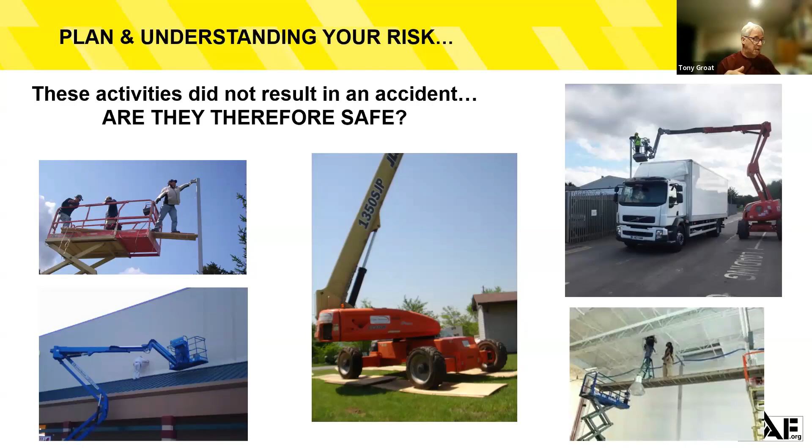So next, I'm going to show a little video of a fall accident, which kind of gives a summary of the points we're trying to make here.

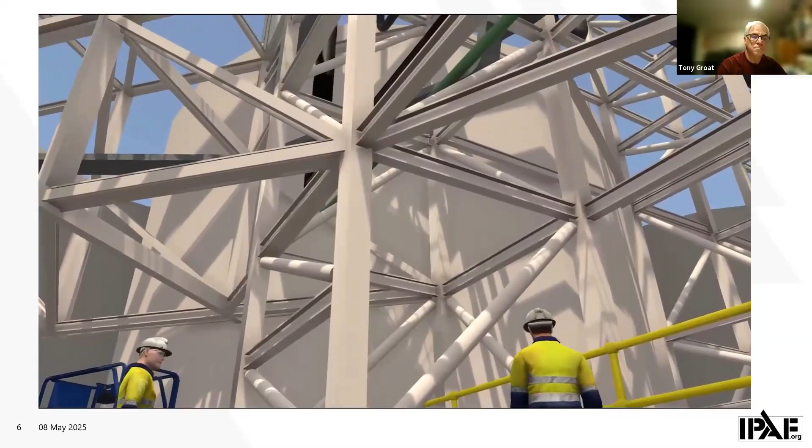On the 29th of July 2018, as part of construction works, two contract workers were tasked to rig a steel pipe in the regeneration kiln area at Cowal Gold Mine. The unusually shaped pipe was required to be fitted 4.8 meters above ground near pipework, tanks, and structures. The pipe was to be connected to existing pipework located inside and outside an existing four-post structure. To accomplish the task, the workers were using a scissor lift.

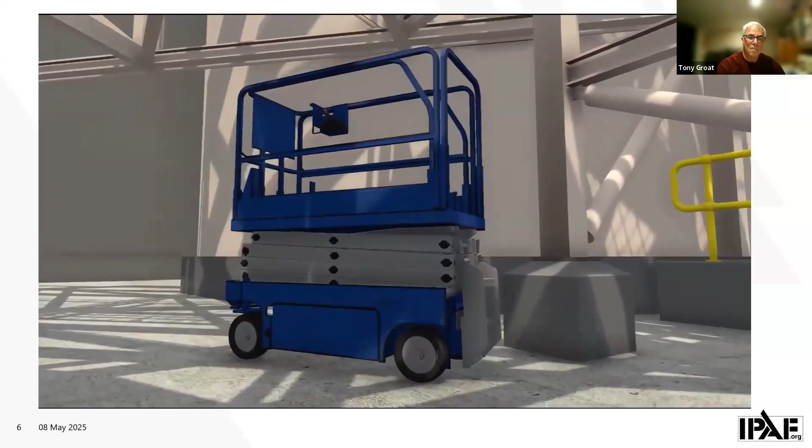The worker was wearing a safety fall arrest harness and connected it to an anchor point on the scissor lift. He climbed onto the scissor lift's platform, which was in the stowed position, and operated the scissor lift using its wired control unit. The workers found the scissor lift to be too high to fit under the angled steel bracing connecting two of the structure's upright steel supports. The worker suggested to his co-worker that they take the guardrails off the scissor lift and then walk it into the structure using the wired control unit. The guardrails would then be refitted prior to use once inside the structure.

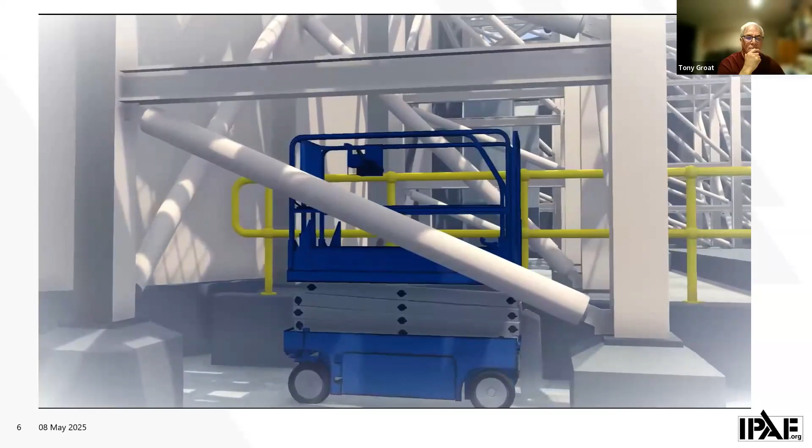The worker and his co-worker unfastened the bolts that secured the front and left side guardrails to its platform. They removed the left side guardrail, lifted the front guardrail from the tubes it was housed in, and rested it on the platform. While still on the platform of the scissor lift, the worker was wearing his safety harness, but did not attach it to an anchor point on the scissor lift. The worker held the wired control unit and began driving the scissor lift forward while on the platform.

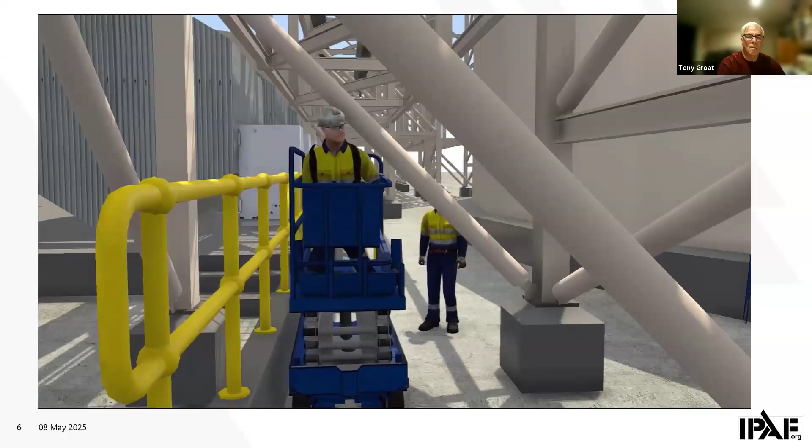As he did this, he lost his balance and fell forward over the front edge of the scissor lift, striking his head on the concrete surface about 1 meter below the platform. An emergency response was activated.

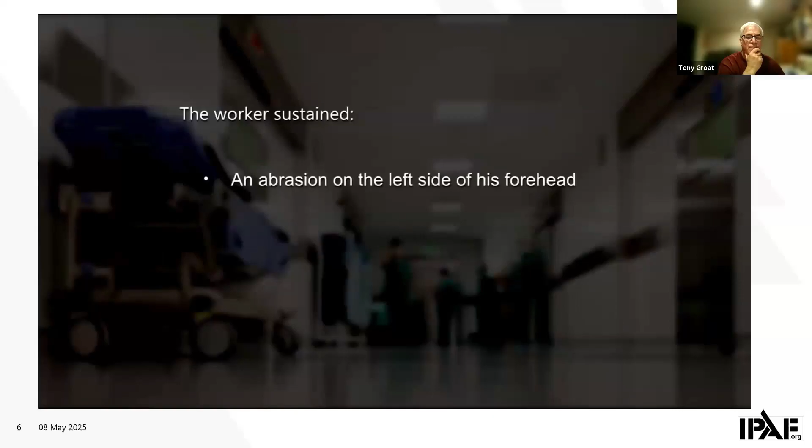The worker sustained an abrasion on the left side of his forehead, experiencing pain and altered sensations in his limbs and left hip. He was diagnosed as having sustained severe narrowing of his spinal cord and underwent surgery, where he experienced a series of complications. On the 8th of August 2018, the worker suffered a cardiac arrest, which is believed to be secondary to his spinal surgery.

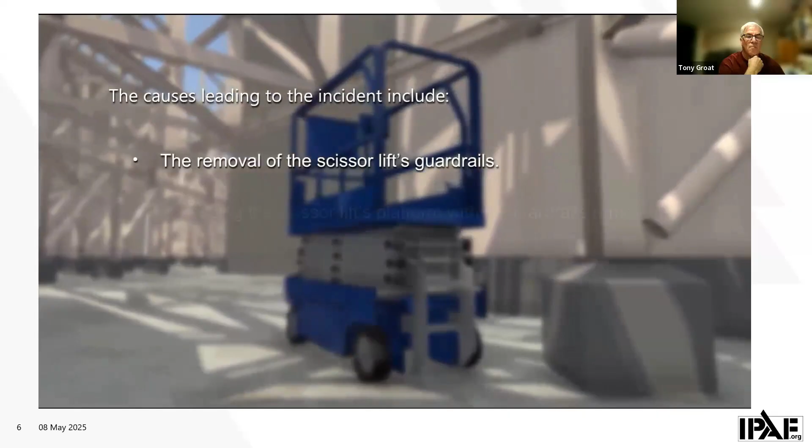His condition further deteriorated and he tragically passed away on the 14th of September 2018. The causes leading to the incident include the removal of the scissor lift's guardrails, accessing the scissor lift's platform with its guardrails removed, and operating the scissor lift with its guardrails removed.

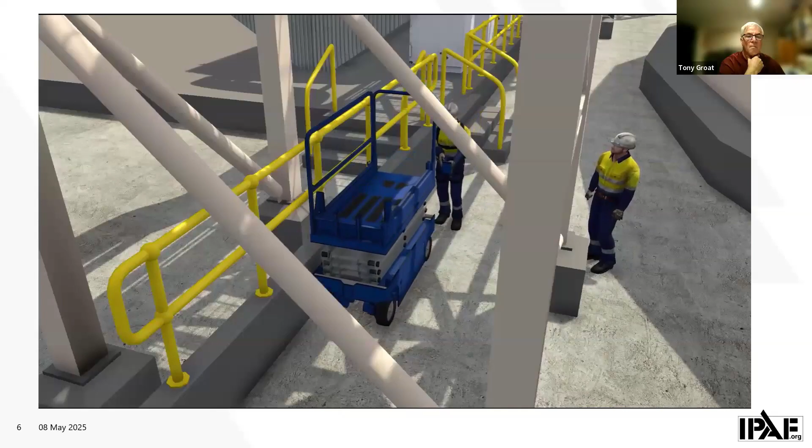The investigation found that had the workers walked the scissor lift through, this incident would have been prevented. Regardless, had the worker's harness been appropriately connected to the anchor point of the scissor lift, it would not have prevented a fall over the side of the scissor lift.

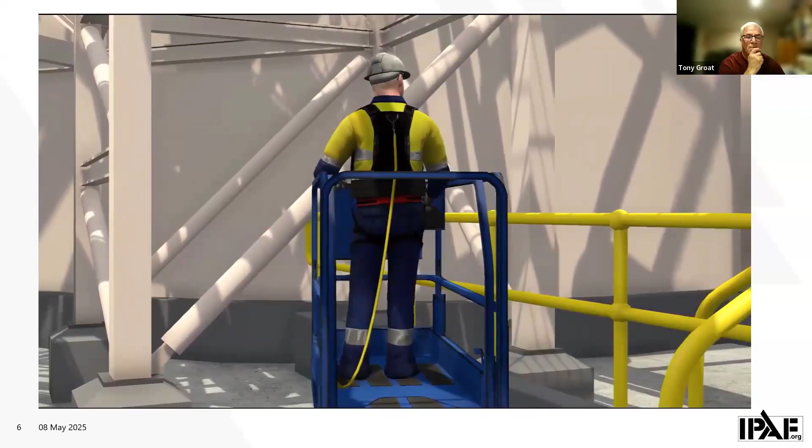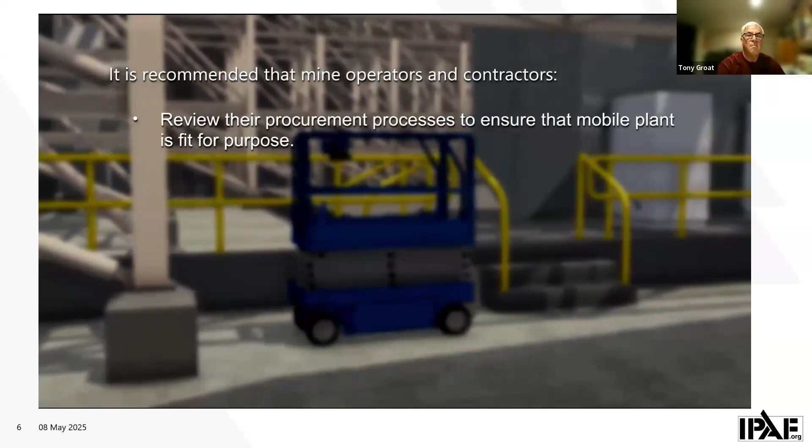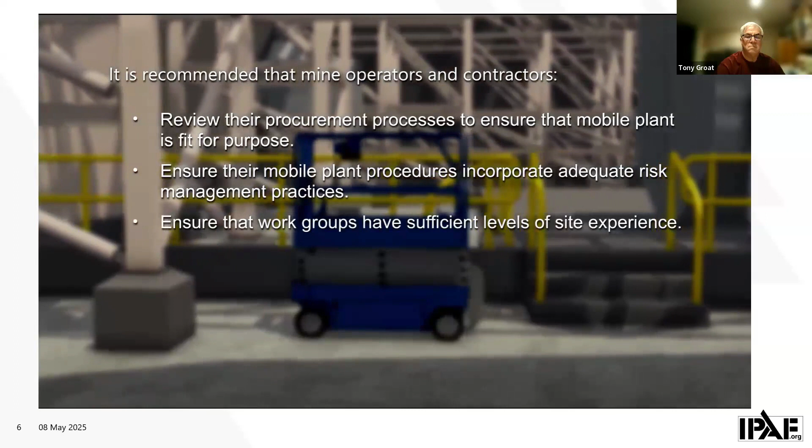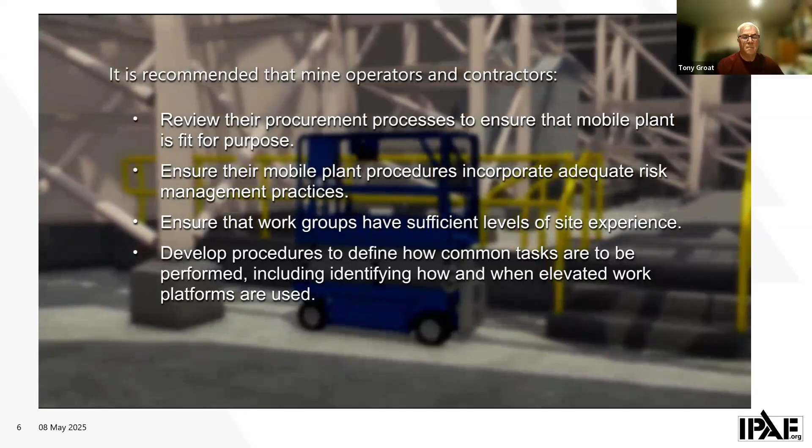While working at heights, most people who are seriously injured or killed fall from a height of 4 meters or less. It is recommended that mine operators and contractors review their procurement processes to ensure that mobile plant is fit for purpose, ensure their mobile plant procedures incorporate adequate risk management practices, ensure that work groups have sufficient levels of site experience, develop procedures to define how common tasks are to be performed, including identifying how and when elevated work platforms are used, train workers about managing risks associated with plant modification, and educate workers about the degree of harm which can occur when working at heights.

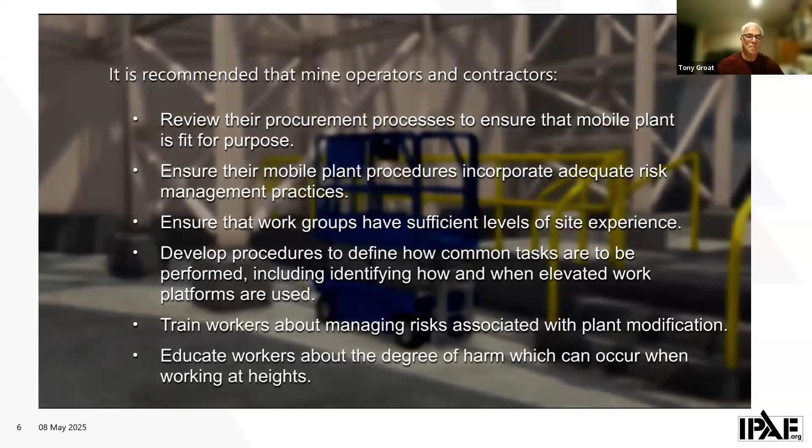So the real message I want you to take from that video were the end conclusions that were made. You see a fall from a scissor lift that wasn't even in the elevated position. You find out that in that particular case, the fall would not have been prevented even if they were wearing personal fall protection equipment. So the fall still would have taken place.

So really what we're looking at, understanding it in its full context, is that safe operations require lots of individual activities. You need to have properly trained operators and supervisors. You need to make sure that you have the proper selection of the mobile elevated work platform and the equipment associated with it, which could be personal fall protection equipment, or protecting the area from someone hitting it.

There's a wide range of those, which is identified through doing a risk assessment and putting in place safe work procedures for hazard awareness, and then monitoring and supervising to ensure compliance with all of those elements. So there's many tasks that need to be taken into account, not just saying, am I wearing the proper fall protection equipment, but that also is another important aspect that we're going to address today.

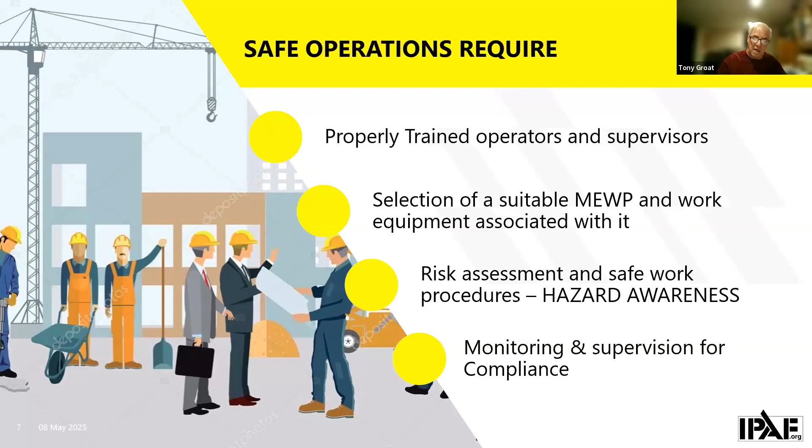So today we're going to be looking at a couple of the pieces of the puzzle. We're going to be looking at hazard awareness and proper selection of equipment.

So the numbers really say it all. If you're looking at it from an OSHA perspective, who mandatorily has reports for any fatal or serious accidents that occur, in 2022, within construction industries, there were over 1,000 workers who were fatally injured. And within that, they have what they call the fatal four, which are falls, struck-bys, electrical, and caught-in-between. Within those, 38% of those, or 410 workers, died from falls in 2022 alone. And that number is relatively consistent over the years.

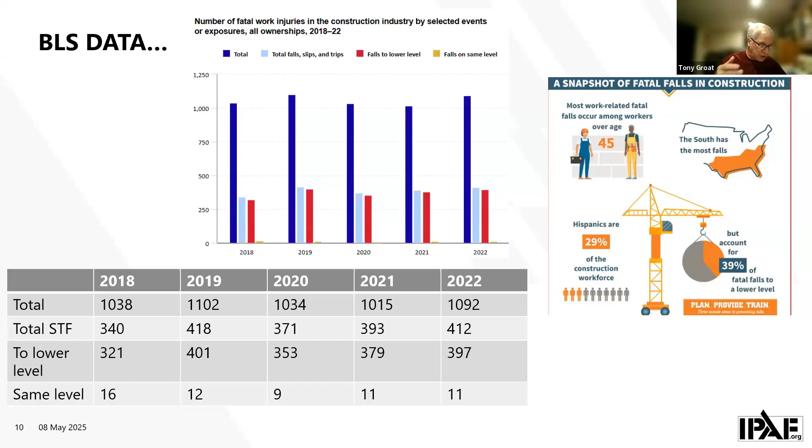And then when you're slicing that onion down a little bit deeper, they give you information that says when you're looking at those within the construction industry, most were related to falls that occur with workers who are over the age of 45. The people in the South had most of the falls. And while Hispanic workers represent 29% of the construction workforce, they account for 39% of fatal falls to a lower level. So looking at the information gives you more education to know some of the areas where we need to look at and concentrate on and take action.

IPAF, as an association, has its own reporting portal that we invite anybody to go to anonymously and put in incidents that occur, and we look at the data for mobile elevated work platforms only. So when you're looking at the data that we have over here, again, looking at the data for 2022...

You can see the first, which is 1B, which are what we call static or vehicle mounted MEWPs. They represent 45% of the incidents that occur. Then you have 3B, which are self-propelled booms. They represent 12%. Then we have vertical mobile machines, which most people call scissor lifts, a 3A machine, that's 29% of the incidents. And then 1As are a static vertical, a lift that goes up and down but needs outriggers, so it's not drivable when elevated. That's 2% of the incidents that occur.

And then there are others, which are mast climbers, transport platforms, and other items outside of the traditional categories. So when you're looking at all of these products, it's telling you that a fall can occur from any one of these.

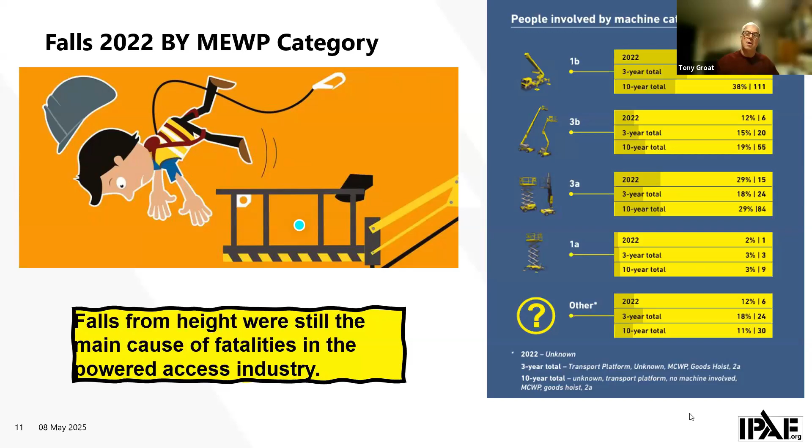So while we traditionally talk about the requirement to wear personal fall protection on boom type lifts, you can see 45% are vehicle mounted and 12% are self-propelled, and 29% occur with self-propelled verticals or scissor lifts. The catapult effect, which we'll talk about a little bit, is why you need to wear personal fall protection in addition to the fully guardrailed platform on boom lifts. But you don't have that same dynamic with scissor lifts, yet we still have people falling out of those as well.

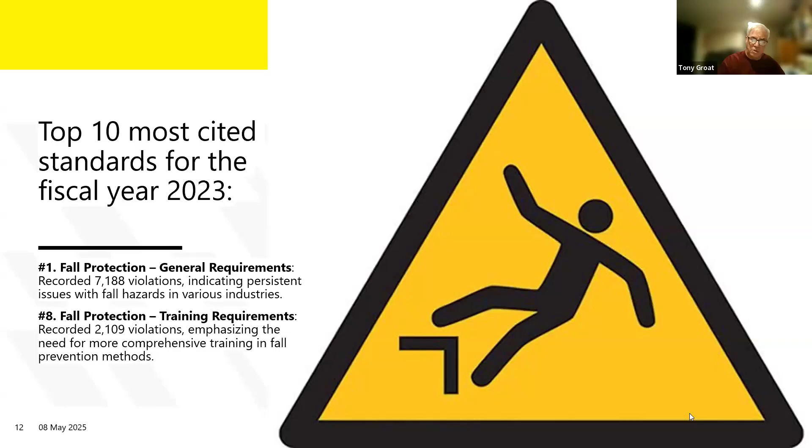When we're looking at the data that comes from OSHA, the top citations show that 2 of the top 10 are related to fall protection. One is the falls themselves, and the other is fall protection training. So these 2 items are constantly at the top of the list, and it's an area where we need to make improvements, because as you look at the accident data, we have over 1,000 every year, and we need to do something to bring those numbers down.

So when we're looking at our standards for aerial work platforms, we have what's called a Group A and a Group B. Group A is where the platform extends over the chassis, and Group B is where the platform extends beyond the chassis, so the tipping point goes outside of that.

And dominantly, we require through OSHA, ANSI, and all other regulations, the use of personal fall protection equipment, in addition to a fully guardrailed platform, on all Group B type equipment.

However, on Group A machines, which are dominantly scissor lifts, a risk assessment may identify reasons you would still wear personal fall protection. It could just be a site requirement. In addition, on Group A machines, a manufacturer may recommend wearing personal fall protection on scissor lifts. I know specifically that one manufacturer, JLG, does make that recommendation. So that would be a case where you'd be wearing it on all MEWPs in operation.

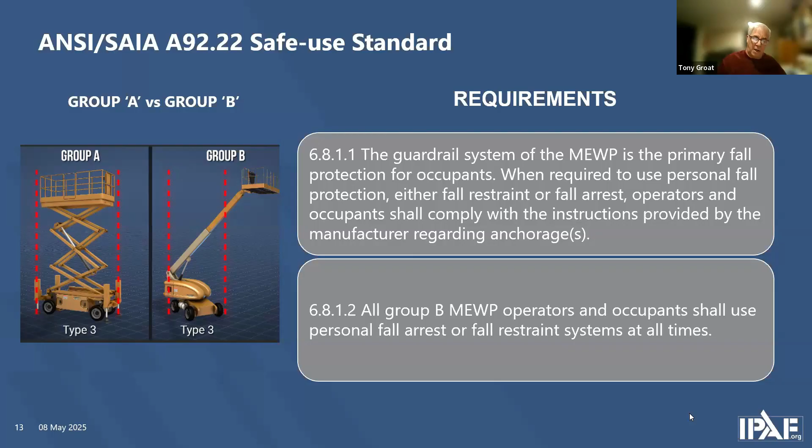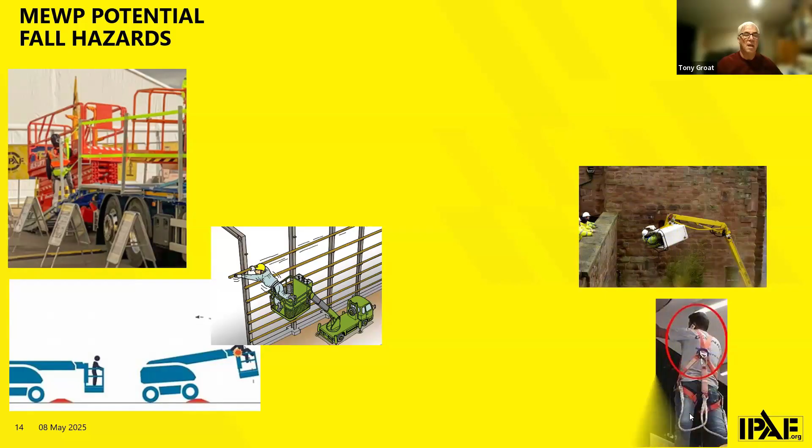So the next thing I'm going to do is take a look at some of the common hazards associated with MEWPs regarding falls. The first one is falls that occur when you're loading and unloading equipment. That's one most people may not think about, but there are an awful lot of incidents that occur when loading and unloading equipment off of a vehicle.

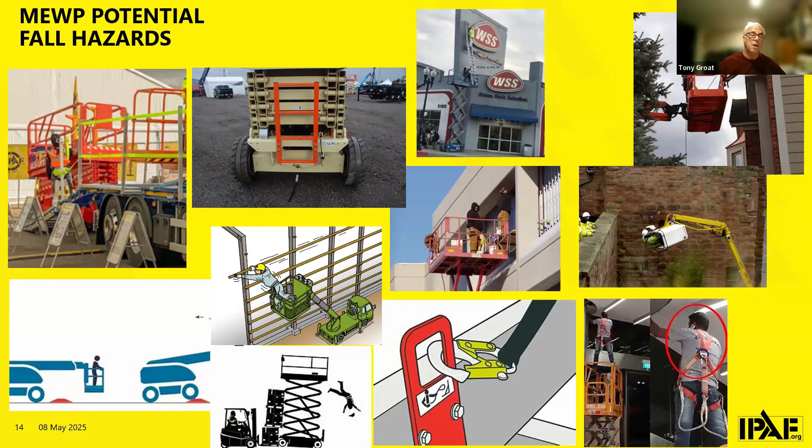Secondly, you have this example down here, which is what we call the catapult effect. When the machine, boom type lifts specifically, goes over some type of bump or divot, you end up with this work platform on the end of a beam. The calculus for that involves what we call the moment of inertia, where all that moment of load is put into the work platform, and it can literally eject an individual out of that work platform.

That's known as the catapult effect. And that is really the reason why OSHA, ANSI, and all of the manufacturers require you to wear personal fall protection in addition to a fully guardrailed platform on boom type lifts.

Down below, you can see here we end up having struck-by hazards. So you have a lift that's up in place and you have other vehicles in the area, could be a crane going by with a load. You have a struck-by, which can end up causing an individual to fall out of the equipment.

You end up having a situation where an individual is overreaching in the work platform. So the work practice here is making sure you connect your personal fall protection. Too often individuals on a mobile elevated work platform are wearing personal fall protection but get in and out of the machine and forget to connect to the anchorage point.

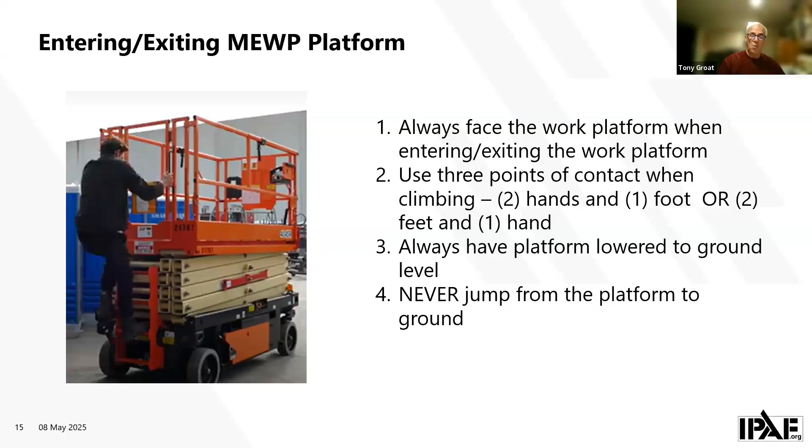So this covers the basic types of falls that can occur. These are the hazards you need to consider when doing your risk assessments and making sure you are properly protected. The next step is to look at what personal fall protection is appropriately selected for this use.

And I'm going to turn it over to Robert. So Robert, now it's over to you. Okay, thank you, Tony. Good morning, everyone. So I'm here to help you determine what level of protection is required.

Selection of the appropriate personal fall protection system. There are three components to a fall protection system: you have your anchor point, your body wear, and then your connection - being lanyard, restraint, shock absorbing, or SRL.

Here are the anchor points that most mobile platforms have, and you have to connect to those anchors specifically based on the manufacturer of the MEWPs, scissor lifts, and similar equipment, because you're anchoring yourself below your back dorsal D-ring. You have to make sure you're anchoring and locked in only on the anchor points of this equipment, so contact your manufacturer to make sure you're connecting appropriately.

As Tony mentioned earlier, training is key - training on how to put on your harness. Just like the picture before where the guy wasn't even connected - he had his harness on, but he wasn't connected. So you've got to have a lot of training. Make sure you get training on how to don the harness, and make sure you have the proper connections and understand how the equipment works.

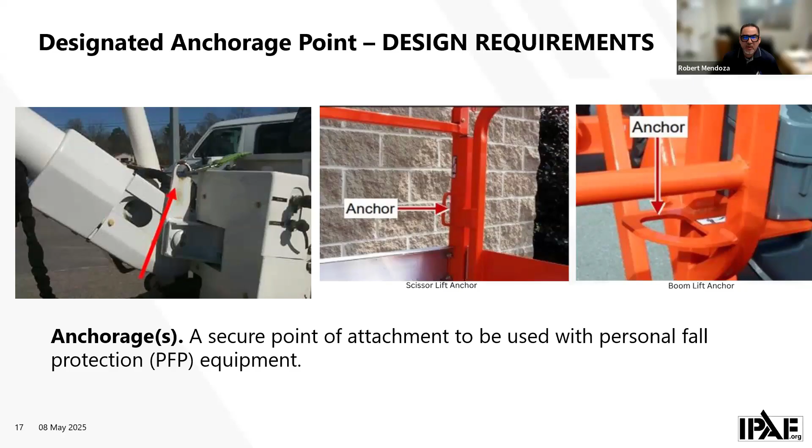On the MEWPs, you are supposed to be using a Class 2 with the new reg of the Z359.14 2021. Class 1s are for overhead connection. In the MEWPs or mobile platforms, it is required an SRLP, which is a personal device, which they're showing a 100% tie off with the 2 legs. But like I say, they do have the single leg, which are most common in these mobile platforms.

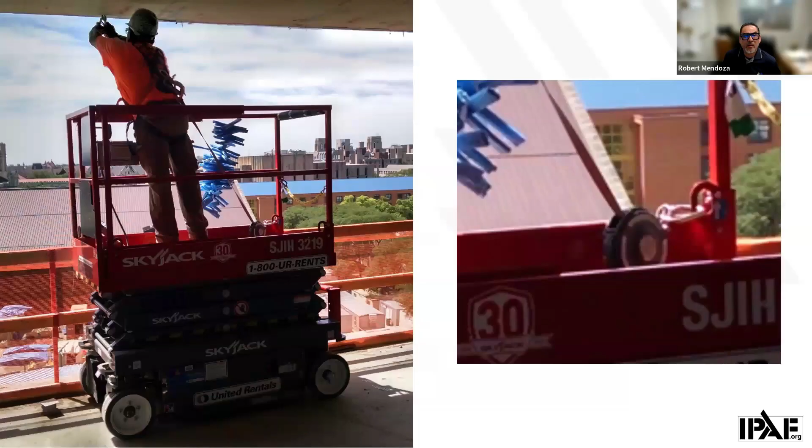So here you see this gentleman connected. As you can see, his SRL is at the anchor point. For the most part, the old standard, you're not able to do this, neither with the new standard, because most manufacturers have their shock absorbing on the outside of the actual block, whereas you have to connect it to your back dorsal D-ring. This one here is an old device because it doesn't show any type of shock absorbing mechanism on that particular device, but it is anchored incorrectly.

There are manufacturers out there that have the new Class 2 where you can use them both ways, where the body of the device can be anchored to the anchor or vice versa to the back dorsal D-ring. But as always, check with your manufacturers to see the proper way of connecting those devices if you choose to use the SRL.

So we try to get things done quick and fast, but at the same time, we need to really have the proper training in order for you to be safe and do your job and not have to worry about connecting incorrectly or anchoring. That's what you need, the proper training in this fall protection equipment.

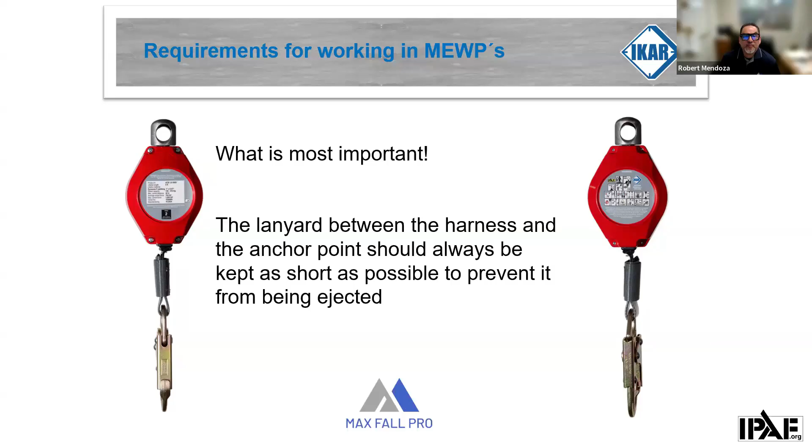So there are three solutions that you can use when using these mobile platforms. There is the fall restraint lanyard, which basically is adjustable. Of course, when you're moving the equipment, you have to adjust it properly, because if you don't adjust it properly, you still can get catapulted out. This device here keeps you inside the bucket. That way, you don't have that catapult effect.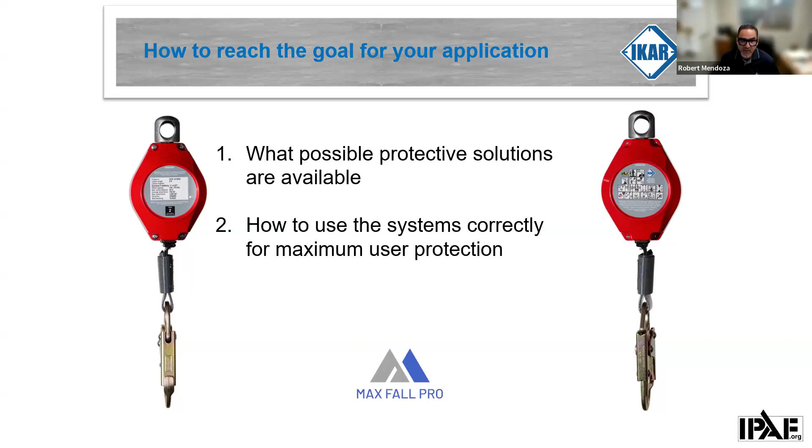They do allow you to use the fall arrest shock absorbing lanyards, but that is not adjustable, and it's 6 feet, and it's possibly catapult you. These are the 3 components that are required. You can use the SRLP and the adjustable restraint together in combination, or you use the shock absorbing lanyard.

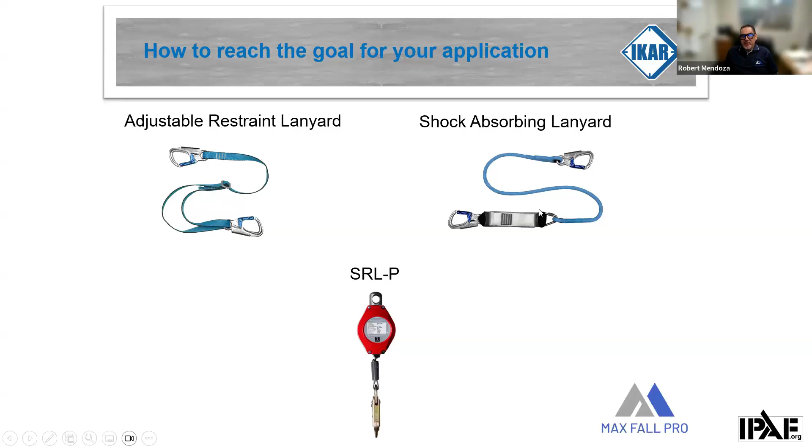So here's a little graph showing you what the SRLP can do, what the restraint lanyard can do, and what's the difference on the shock absorbing. As you can see, the SRLP is the combination of a restraint and shock absorbing mechanism, so you can use that as your fall arrest equipment. The restraint, of course, is just to do the job of restraining you from climbing the rails, reaching out, getting over the guardrails. And the shock absorbing works as if a person does go over the rails, it will catch them also in arrest.

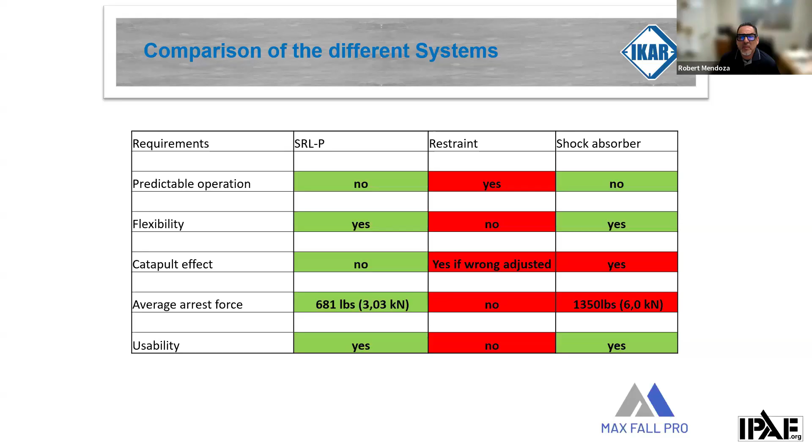This video is going to show you the effect of the catapult.

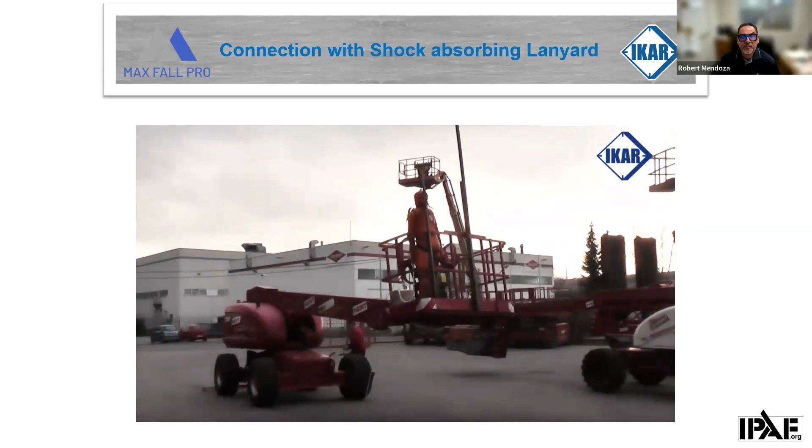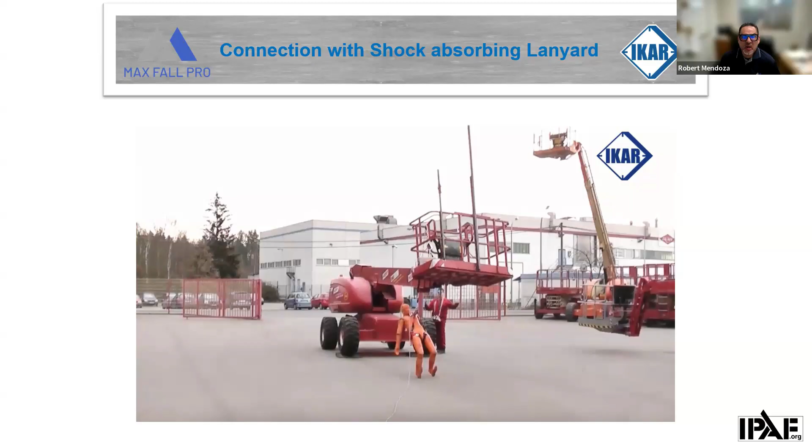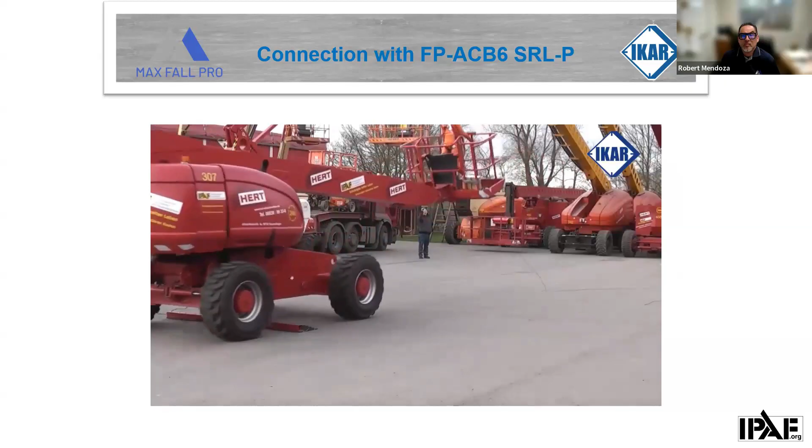So that was with the shock absorbing lanyard. The next one is going to show you what an SRLP does when used while moving the mobile platform. So you see there how quick the SRL pulls them into the basket and not causing the catapult effect. So that gives you an idea of what the SRL can do when you're moving your mobile platforms.

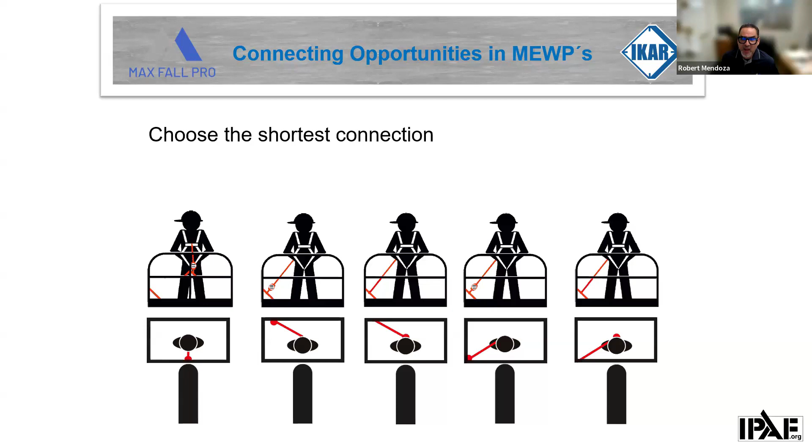So here are different connections on the devices that some manufacturers can use both ways, where you can connect the body of the device to your back dorsal D-ring or the anchor point of the MEWPs. But like I say, just check with your manufacturers of your SRLs to make sure that theirs are capable of doing this, which most are not, because of the external shock pack that they have on their devices.

So basically, what we're saying is that the SRL would probably be the best combination to use. And you could still use the 6-foot shock absorbing lanyard, but once you connect the SRL, you don't have to worry about your fall protection.

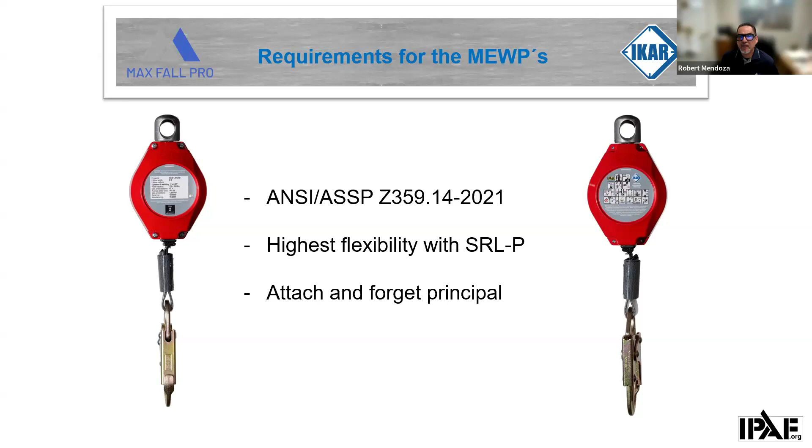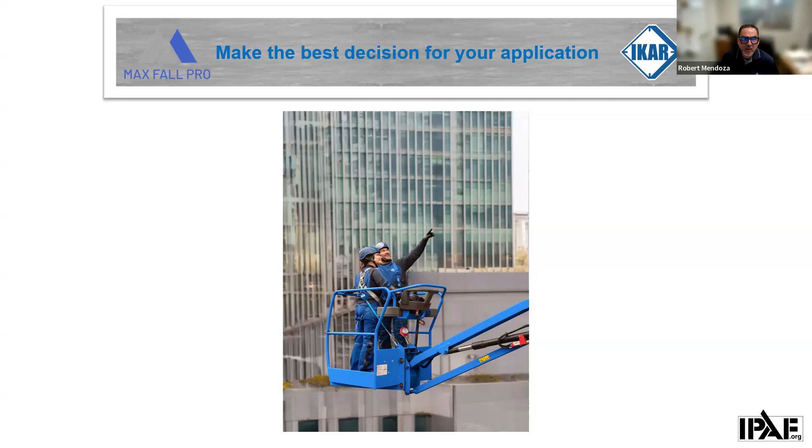So this kind of summarizes the equipment that is used on these MEWPs, and just to let you know that training is key. You want to be able to don that harness correctly, not just let it hang on, not just put it on so you can make your quick repair or whatever you're working on, but put the proper equipment that is authorized for using the MEWPs by IPAF.

And that's it for today, Tony.

Thank you, Robert. So again, now we go to the next step, which is we have a fall, if someone falls wearing personal fall protection.

This really becomes critical, looking at this from a systemic approach. You need to have a fall protection rescue plan. We could do a multi-hour presentation on that topic, but we're going to give you the most basic approach, which is that a rescue plan can include a self-rescue by the person involved.

A self-rescue could occur if the machine isn't moving and the person can use auxiliary controls in it. But if he falls from it, there are actually devices you can buy from the personal fall protection manufacturer that give them a leg rope they can climb on. So there's a way to do a fall rescue by the person themselves, which is the self-rescue.

We can also have an assisted rescue, where the person falls from it and may be unconscious or unable to move, without the tools to do a self-rescue. In that case you have an assisted rescue, which generally involves a ground person using the ground controls on the MEWP to lower the individual down to the ground.

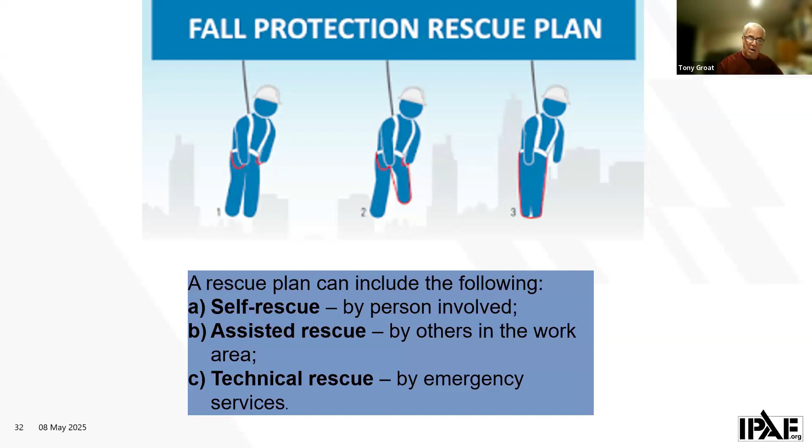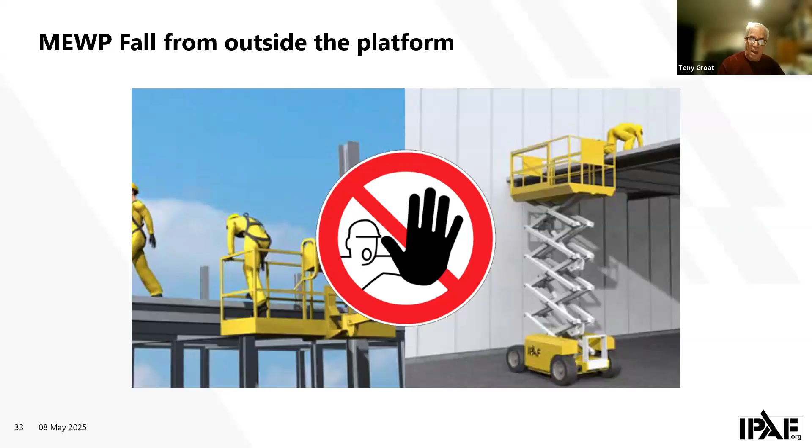We have MEWP falls from outside the work platform. Too often people are using these as elevators, and they're not elevators. They are mobile elevating work platforms meant to allow you to access work at height. When you have these applications in place, you need to understand that you're putting your people at risk because there are obviously fall hazards here.

But today manufacturers have lots of tools out there that identify the needs of people. Here is what we call an access deck. Too often you've seen people putting planks across the mid rails to gain some temporary work at height that they can't get with their guardrail system being in the way.

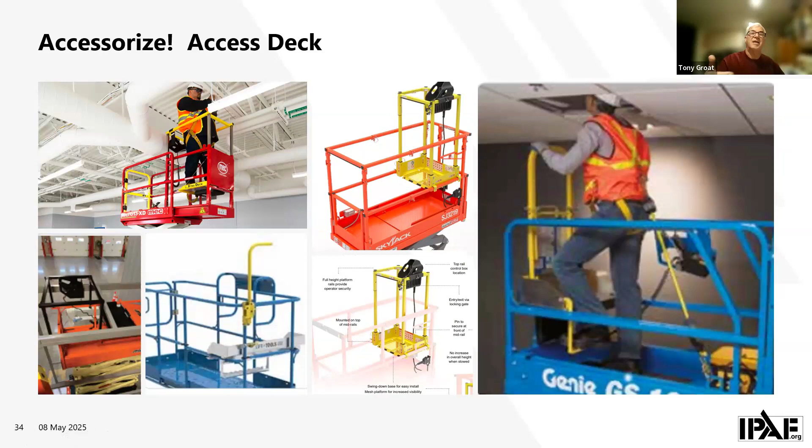So these tools are now very common in the workplace. You can see they're available on many scissor lifts, and some are also available for use on boom-type lift platforms. So understand what accessories are out in the marketplace today.

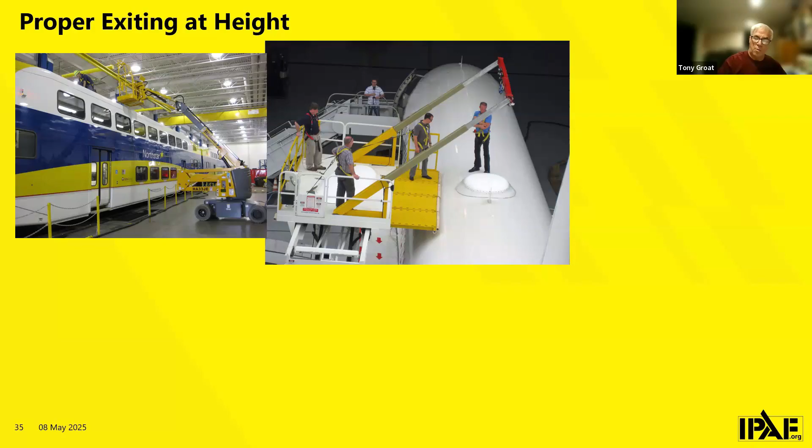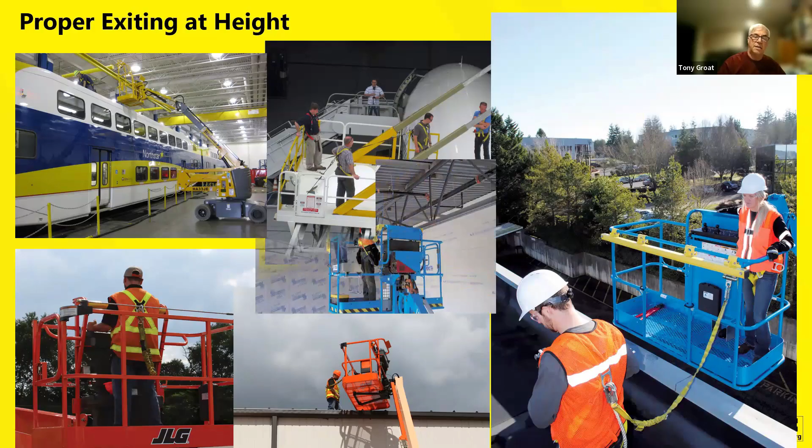When you're looking at proper exiting at height, manufacturers have developed specialized equipment for particular situations. They're also putting out devices that allow you to access work at height and exit at height using new guardrail systems and anchorage systems.

Both Genie and JLG are two examples of manufacturers who have this external anchorage system you can use to work outside the platform. But it requires you to have a process defined in writing by the manufacturer to allow that operation to occur. These are tools that are out in the marketplace today.

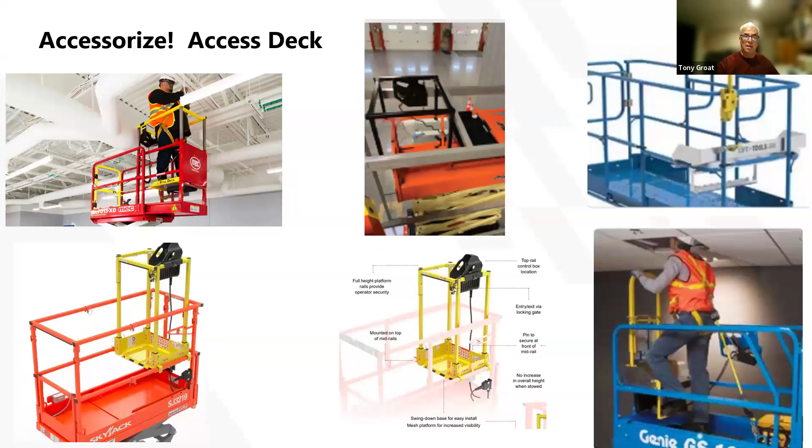And again, this is just a clear view of those accessories. The other item available in the marketplace is a lanyard detection system, or what we call an intelligent anchor. The intelligent anchor allows you to identify whether the individual is connected or not, and there are multiple systems out in the marketplace today.

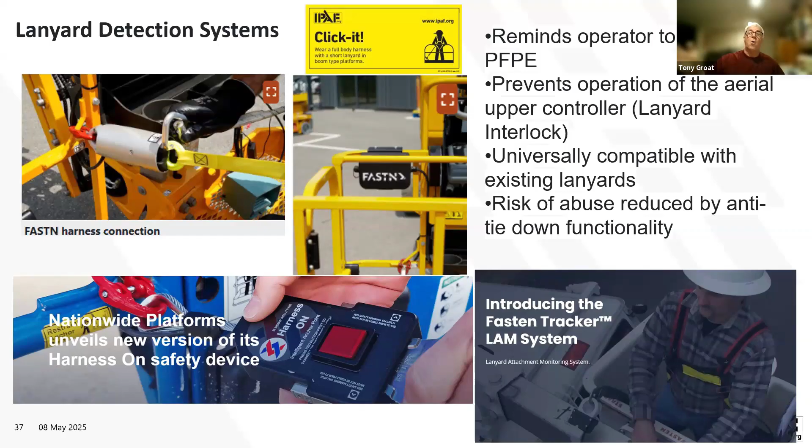And it would be my expectation that in some future design standard, it'll be a requirement, and you'll find that it will then be introduced on all MEWPs that are being manufactured from that point forward out in the marketplace. I'm going to give you an example of one manufacturer's system so that you can see this is out in the marketplace today. The Niftylift Clip-On is simply a sensor system that we attach to our current harness points that tells the operator and the ground teams if they are or are not clipped in.

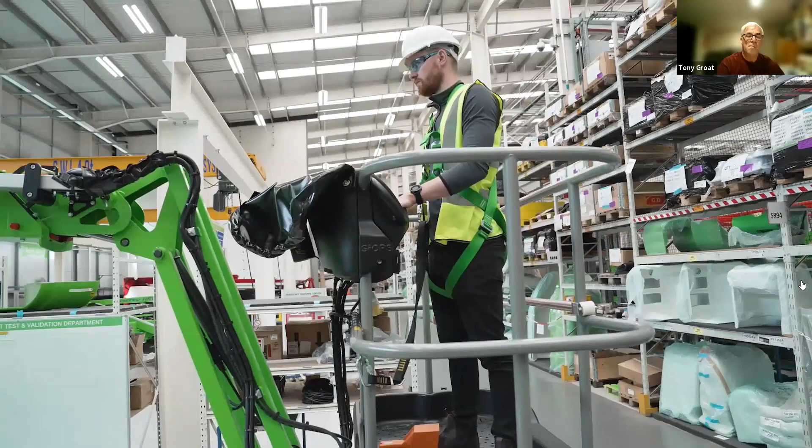The system provides a visual and audible aid to not only just alert the operator but the ground teams as to the current status of whether the operator is clipped on to his machine. The system was developed really to react to the market's requirement for additional safety features to alert whether an operator is or is not clipped into the MEWP.

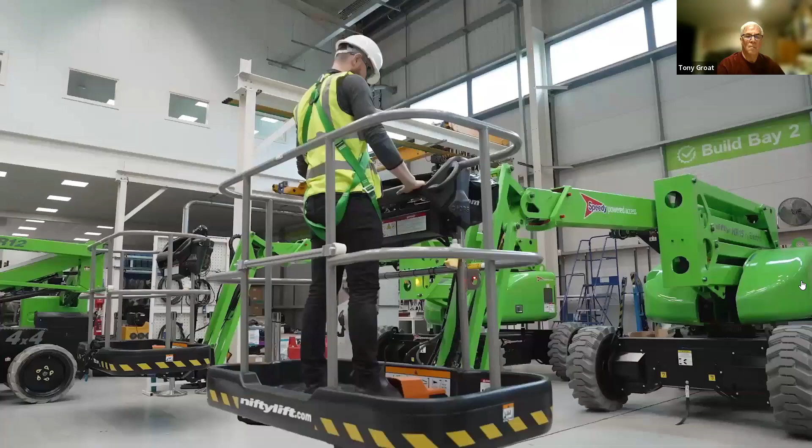When the machine is switched on, red LEDs above each harness point indicate that no harness lanyard is attached. If the operator tries to activate the machine using the foot switch, an audible alarm will sound as an additional reminder. The LEDs around the machine will change to green as soon as a harness lanyard is attached, and the alarm will stop sounding. The green light under the cage clearly indicates to the ground team the status of the operator harness attachment.

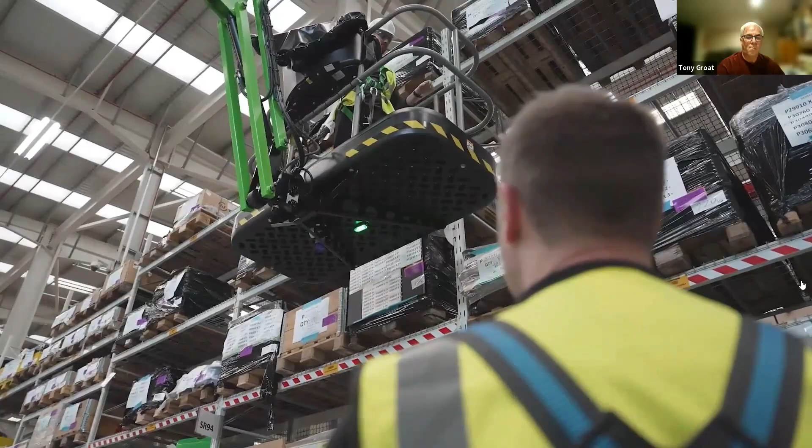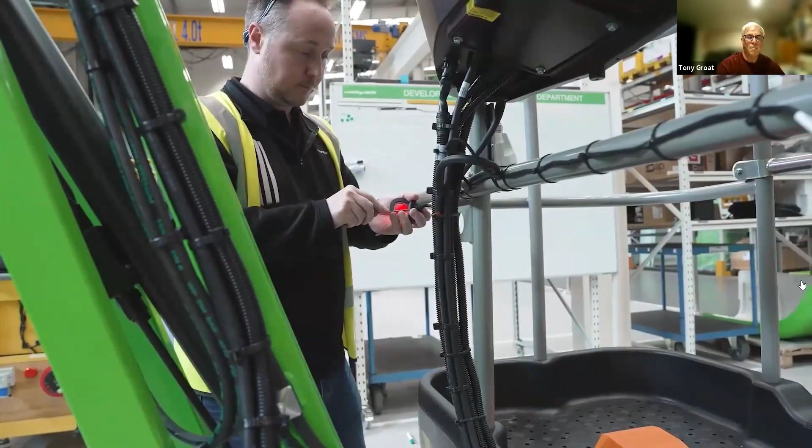So we wanted to make sure that the system was as easy to use and simple for the operator. And the beauty of the system is that it can be retrofitted to existing machines. The Niftylift Clip-On system aids in site safety by providing an aid to operators and site management teams.

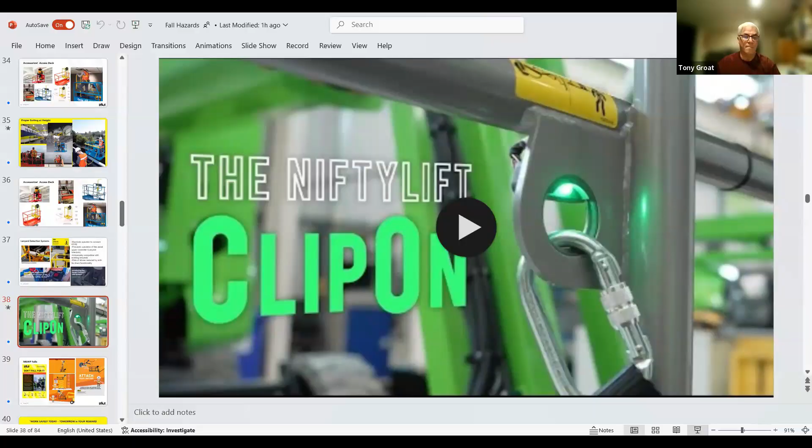Okay, sorry about that. So again, the important part of that one is, as a lifelong user of this equipment, I'll tell you that I'm a well-trained and educated person on the hazards and the use of this equipment. I get in and out of a lift depending on the work that's being done, and I'll find one time I'm up in the air and I forgot to connect. And unfortunately, sometimes it's that time that one person has forgotten to connect that an incident occurs.

So having that warning signal out there is great for the operators and their occupants to make sure that they're connected. The last thing I'll put out here is that there's lots of information out there available for you. IPAF has on its website lots of toolbox talks and posters to remind people. So keep in mind that someone has been trained as an operator, and every 3 to 5 years they have to get trained again.

That's a long period of time, depending upon their frequency of use, so have toolbox talks and reminders and refreshers of these types of issues, to always be attaching when you're on a boom type lift or where you require it within your organization. All the other attributes that will help prevent falls from occurring are available to you. You go to the website, they're available for free, and download them.

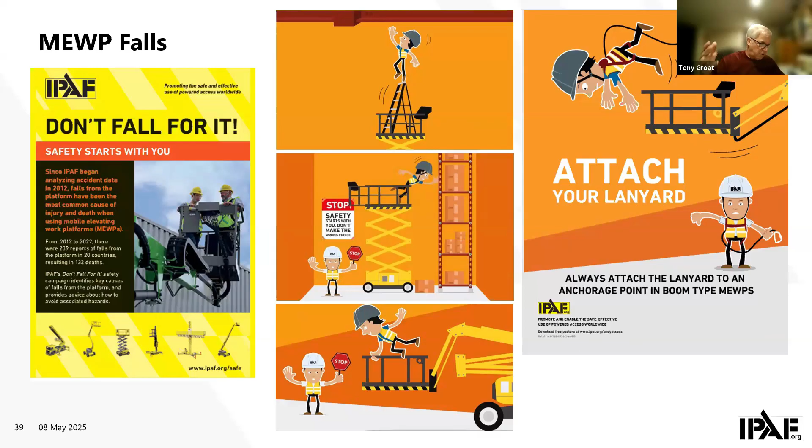But at the end of the day, the most important point that we'll make is work safely. Tomorrow is your reward. So if you're a worker out in the marketplace, you have a responsibility for your own safety as well. So make sure that we're not taking shortcuts. We're doing the best and following all the rules and regulations that we have in place, because it is really when those shortcuts are put into place that we're exposed to potential accidents.

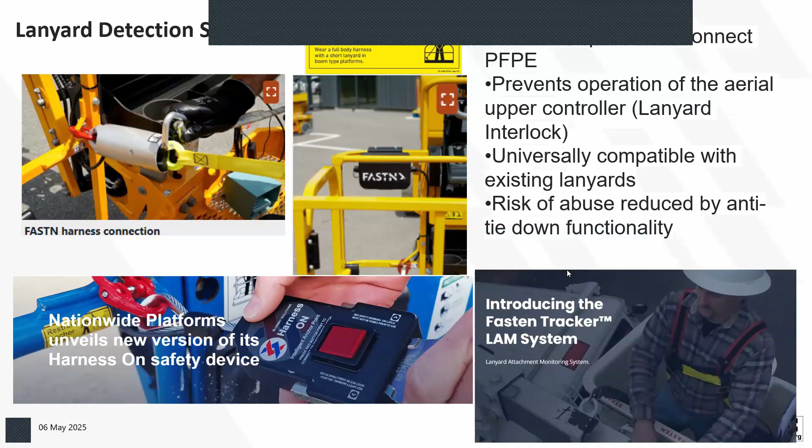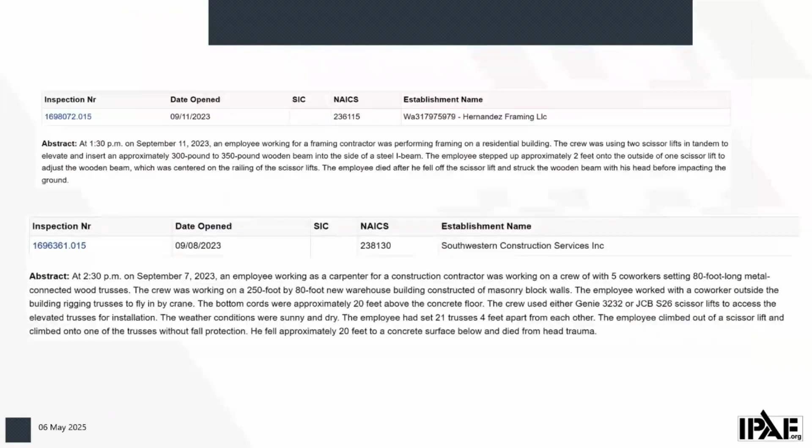Any other questions, Anna? Oh, okay. So Guy is saying there is a lot of discussion regarding SRLs. I am glad you mentioned that they must be the proper type and used correctly. There are ones that are not appropriate. Thank you, Guy. Yes, that is correct.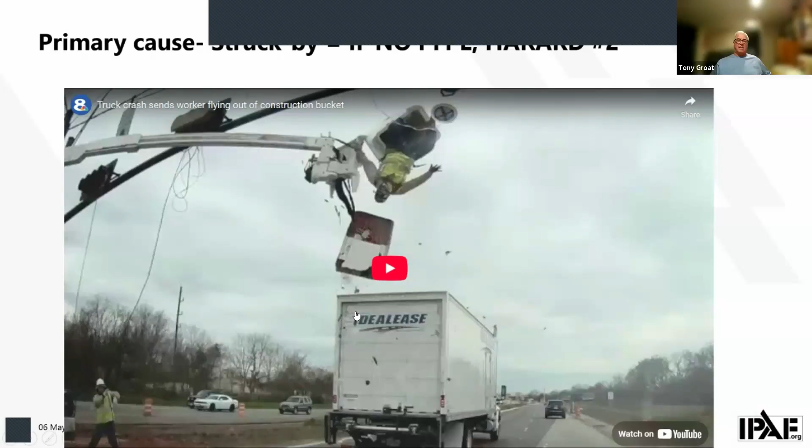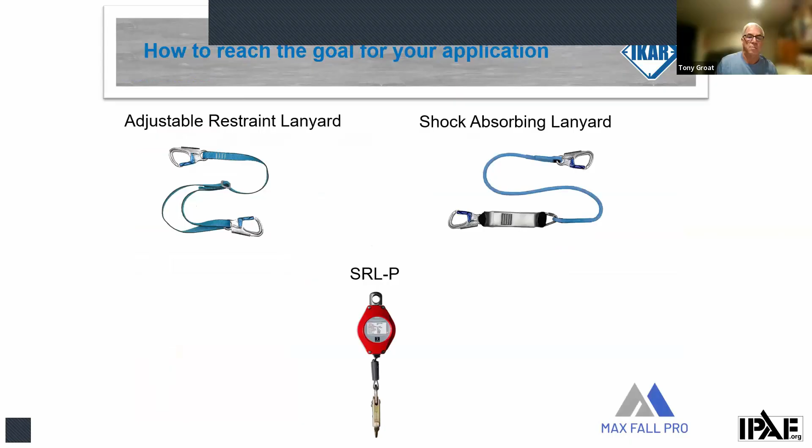Robert, would you do me a favor? One of the things that I think is a question mark in the marketplace today is the selection of the SRL, and we now have a new Z359 requirement that speaks to this new nomenclature, the class 1 and class 2. So Robert, what happens to those that are out in the marketplace today that don't have these nomenclatures on them? Can you speak to that a little bit? As far as the old standard devices?

Well, yeah. Right now we have a lot of SRLs in the marketplace that are being used, and some of them were manufactured to the prior standard. They're not going to say class 1 or class 2 on them, correct? Correct. Those will probably say class A or class B. When you're purchasing new devices, you have to have class 2. If you have existing devices that are still working properly, you need to check with your manufacturer to make sure that they're still approved and can be used in the scissor lifts or your platforms.

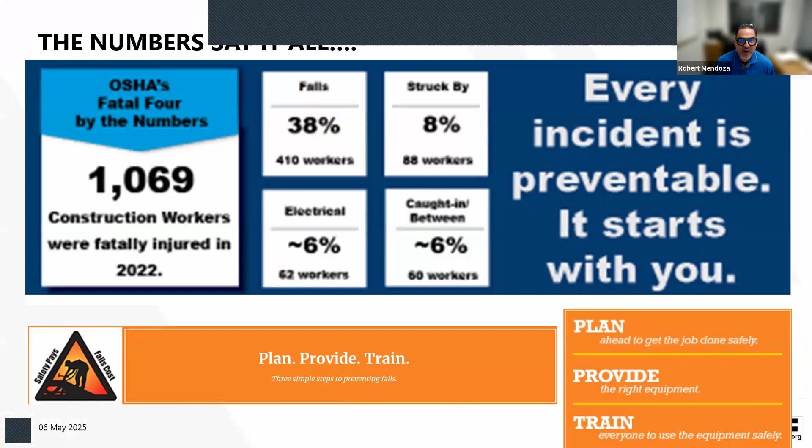Class 2, for the most part, most devices out there, the SRL-P, which is a personal device, that's what the P is for. Those are the ones that are required in the MEWPs. For most manufacturers, those can only be connected to the back dorsal D-ring. There are manufacturers that provide a class 2 device that can be used both ways, which we showed in one of the pictures, where that device could be anchored at the anchor point or at the back dorsal D-ring.

But like I said, that's when you have to do your homework to make sure that manufacturer's device is able to work that way. Otherwise, you have to use it the way it is intended, which is on the back dorsal D-ring.

You cannot use Class 1 devices, because those are anchored above your head. So you have to use a personal device, which is the SRLP. You cannot use just a regular SRL, because there are SRLs that are not personal but can be used both ways, but they're not allowed to be used in the platforms, because in the platforms you have to have a personal device.

So to be very clear, you see here's the SRL device and it's connected to the anchorage point, and we would speculate that this manufacturer does not allow it to be used this way. That's correct. That device is not a Class 2, and the reason I say it's not a Class 2 is because most Class 2 devices have, on the body portion, a shock-absorbing mechanism or pack that is an external impact device, and that one doesn't have it. So that is the old standard.

Wow, that's the first question I've heard of that on a platform. Usually, like we discussed, the combination is where they're putting a restraint. He means double lanyard.

Yeah, because you're only moving 6 feet. Let's say the platform is 6 feet by 8 feet, and you're tied off to one corner and want to move to the opposite corner to be tied off and then disconnect. That's the purpose of twin lanyards, to be 100% tied off at all times.

I would say typically we would not use a twin lanyard in a MEWP because of the size of the platform. The only time you may use it is with some large platforms that have different anchorage points. As you're moving around these large platforms, you may need to keep yourself 100% tied off by going from one anchorage to the next.

But you would never be connected to two anchorages as an example, putting one on, so I'm on restraint, but I can move between the two. It's really intended to be connected to one at a time, but keeps you 100% tied off while making that move. And that could be within the platform.

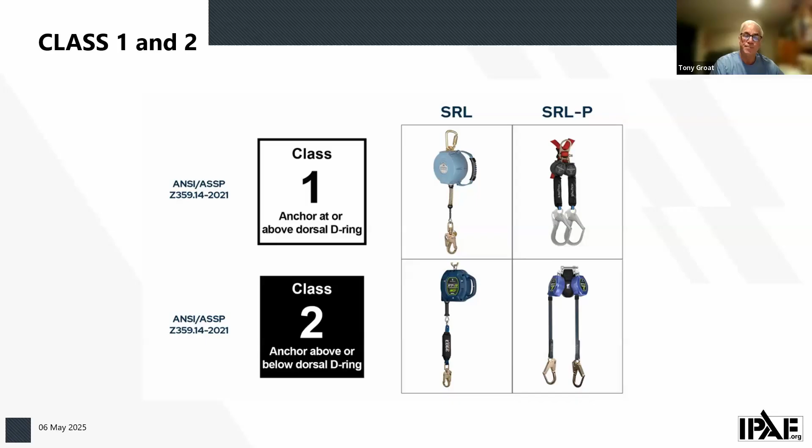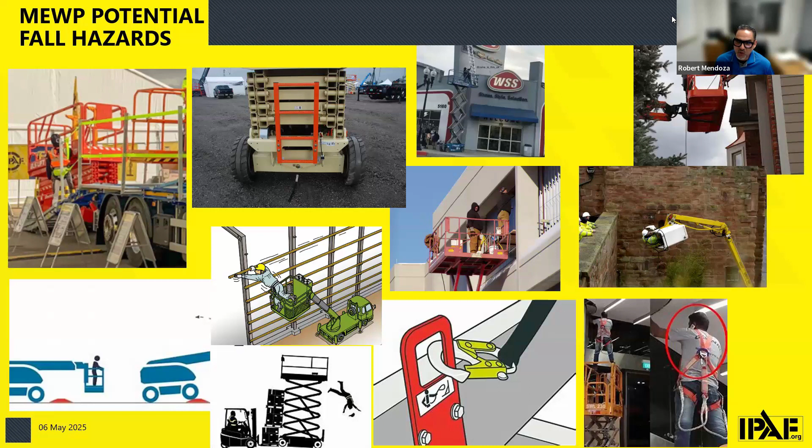With my experience with the clients we have, I've never sold a twin for that purpose, to be used in that configuration in any type of mobile platform. If you do use that particular device, it would have to be connected to the back dorsal D-ring only. It's not something where you anchor at the anchor point, grab the hook, and say 'I'm going to go over here, use this one, go over there, use this one,' or tie two people off with one device. So it's just training and reading and getting with the manufacturer to make sure it works for your application.

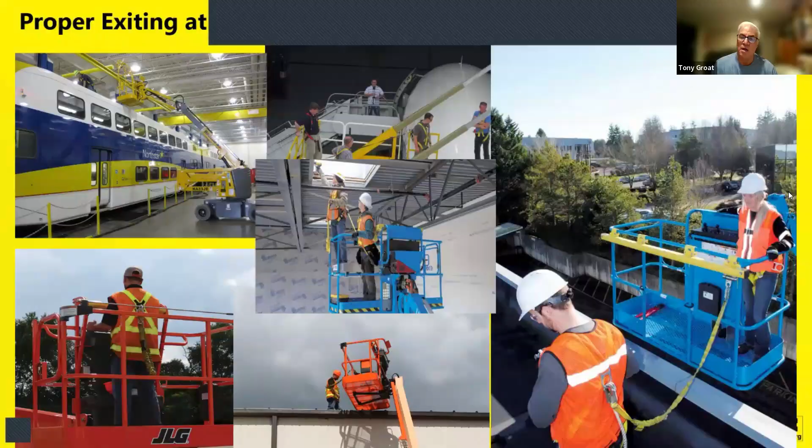Okay, we're getting close to the end. Any other questions before we close out? Well, Guy is saying thank you.

So there is no requirement in ANSI Z359.14 for an annual inspection. Robert, I'll let you address that. Yes, there is — it's based on the severity of the use.

If you're using it just to change a light bulb in the warehouse, then at that point you don't require an annual inspection. But if you're using it every single day in the mines or inside a steel manufacturing plant, it's the wear and the use — at that point you require it to get inspected.

There are facilities out there that will do the inspections for you, for the manufacturers. But most manufacturers are going to have some requirement for an inspection. As a manufacturer, MAXFALL Pro, if the company or client doesn't have one in place, then we would ask them, after a year, send it back so we can make sure everything's working properly.